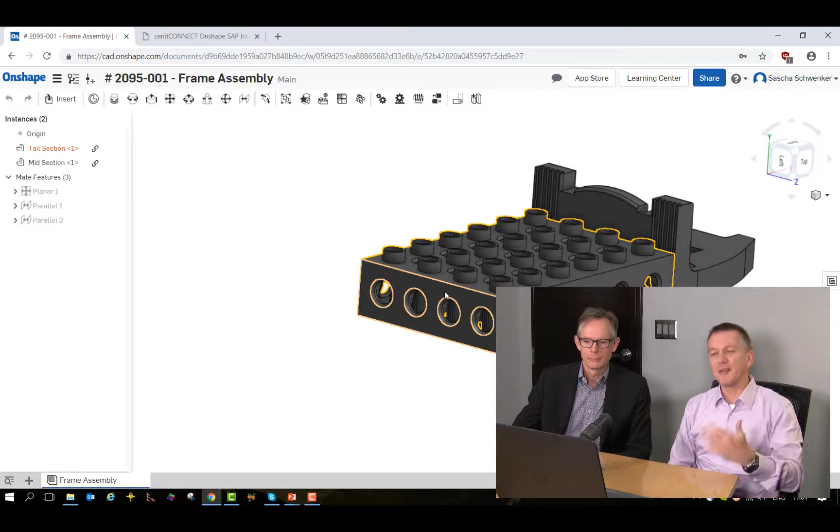Onshape. We did a single release to this, so a kind of a quick introduction to this in the last video. And we basically start over here where the quick introduction stopped. So what you see here is our integration into Onshape. I will emphasize Onshape a little bit more later on, but just note that we have version 4 actually inside SAP with all documents. It's all checked in, all buttoned up, all inside SAP.

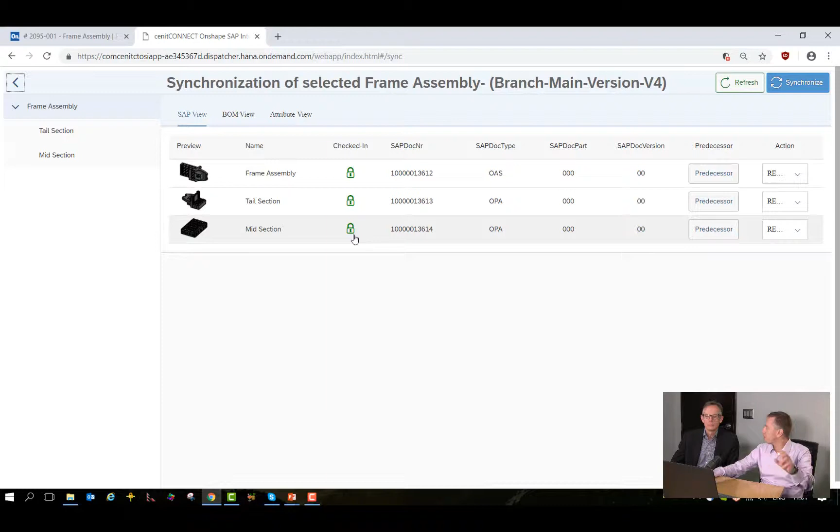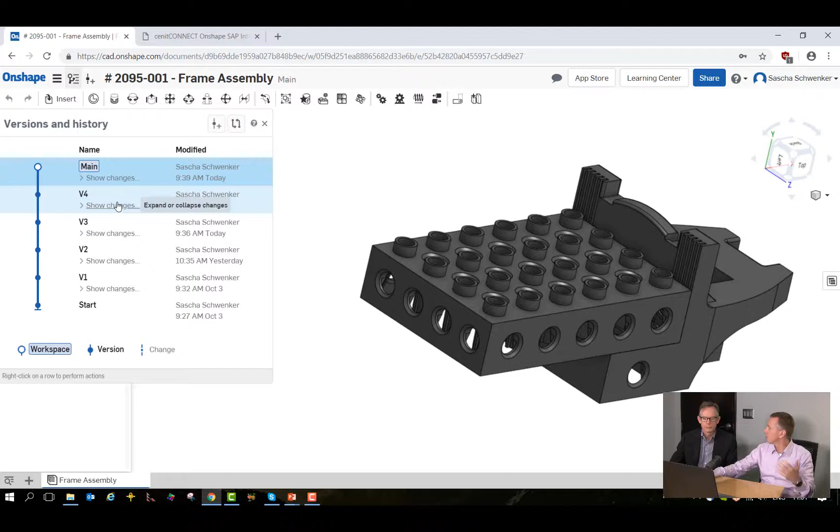So if I go back to Onshape right now, this is my Onshape assembly here right now. It has 2 items. If you know or don't know about Onshape, it is very heavy on versions - you basically create always a new version with every single design change. So I'm on the 4th version, and this is the version I synchronized over to SAP. What I will do here right now is a small modification. I will introduce a brand new part never seen inside SAP, and then we see how the integration picks it up. We create a new version and basically show the integration functionality.

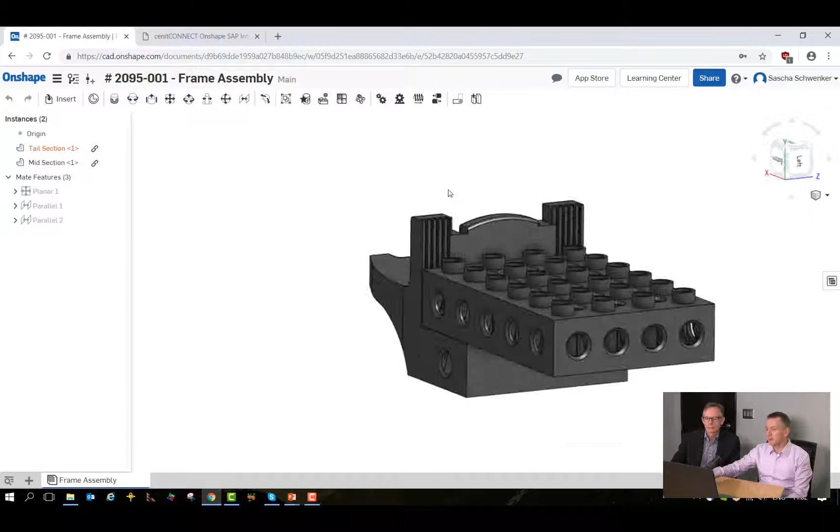So maybe some introduction to Onshape - like Paul said, it's a cloud-based CAD system. This lives in, in this case, Chrome or any kind of Internet Explorer, or any kind of web browser. You see I can spin this around, so it works pretty well - performance is pretty good actually. And I have here all the functionalities to mate these 2 items together. So I'm in what we would call the assembly workbench.

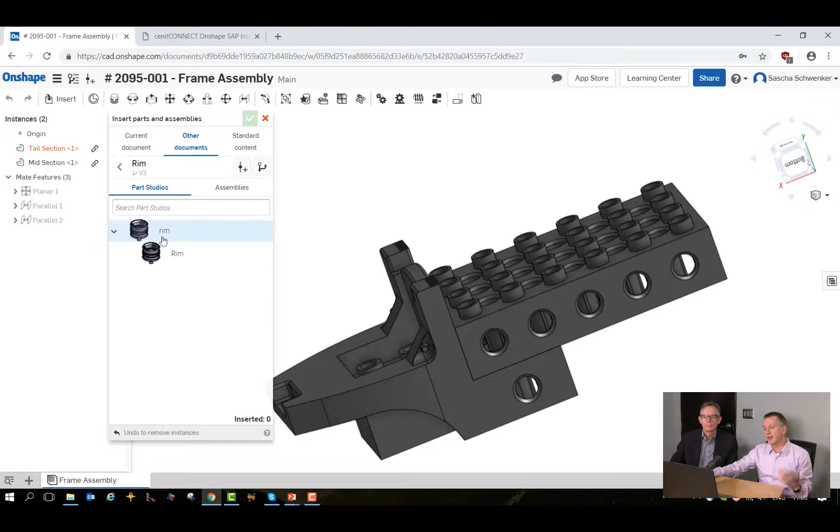So what I do here is I will insert a new part. I can get this from my other documents in Onshape, and I have my so beloved Lego digger. So I imported this into Onshape, and there's a new item - this is the rim. You see the rim has the newest version, version 3, here. And these versions don't really have a lot to do with the SAP version - this is really to be seen how they match up to versions later on inside SAP. So now, where's my rim?

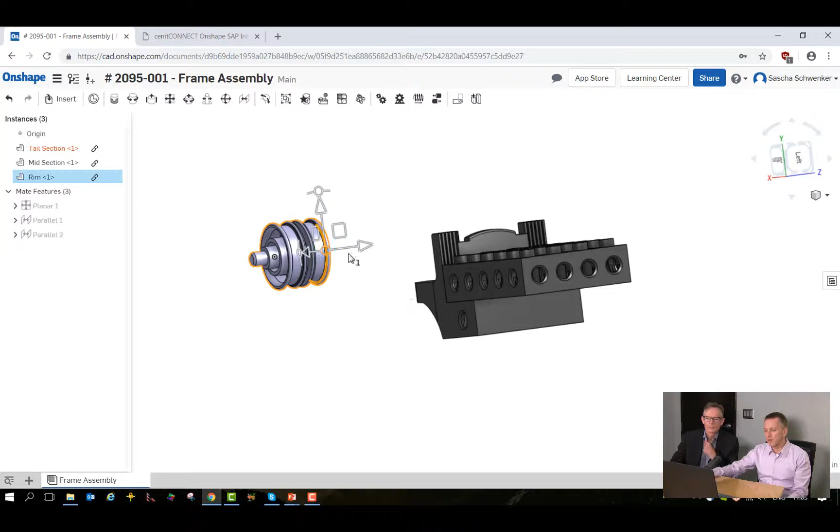This gives me some more freedom on the version and revision management here. But now I can basically place it, move this around, and position it into the right place inside my assembly. So I'm stopping here, not showing that I'm the best...

Onshape designer here. So what we take out of this is the rim is now inside the assembly.

Actually, I'm waiting for you to start singing here, somehow. I hadn't really prepared anything. Okay, all right, so it just somehow occurred to me.

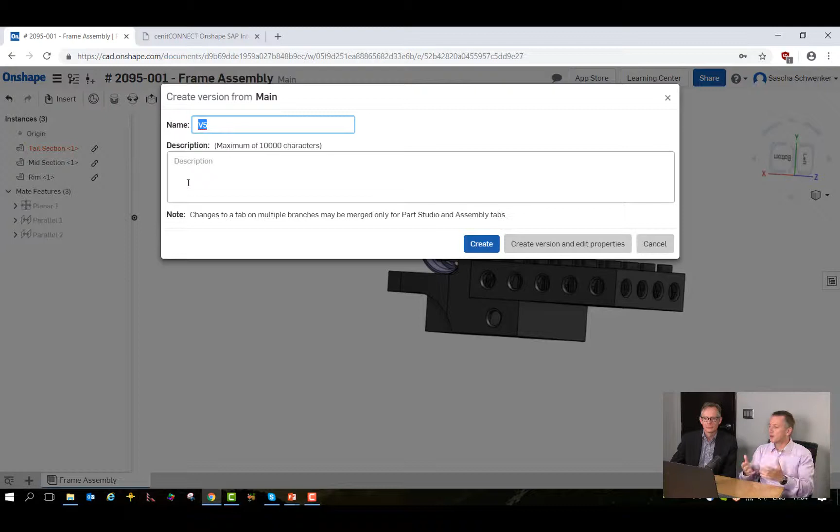Good. So with this change, with the import of the new rim—and normally I would import all 4 rims, etc.—what I would do in Onshape is create a new version. This version is basically a design milestone in my assembly.

So I say this is my version 5, added new component, this is correct, and I create this version inside Onshape. And that's it—you see there's no save, because we are right away in the cloud. I don't need to save any files, nothing. This is saved the second I perform this action.

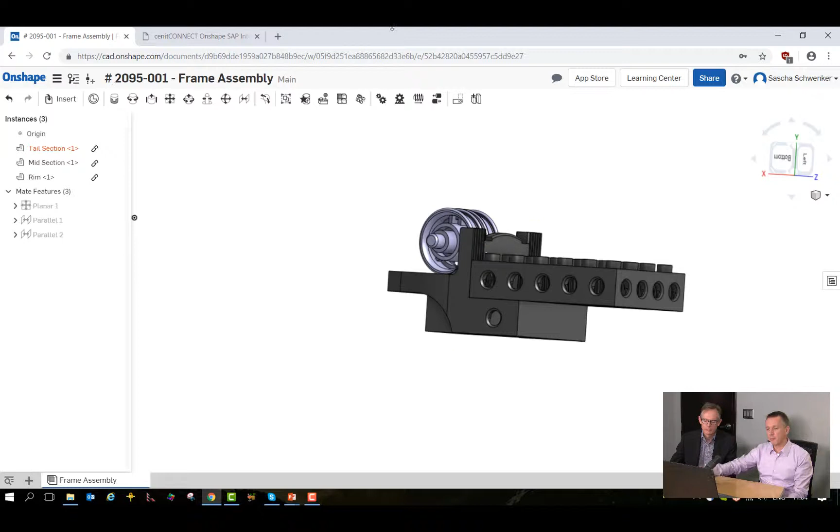So now let's come back to the integration aspect. What we are doing here is scanning the Onshape database, and the system sees right away there's something new, and I can now pick my version 5 of this rim. You see I have all the other versions as well to my disposal, but in this case I say I would like version 5, and I say let's load this version.

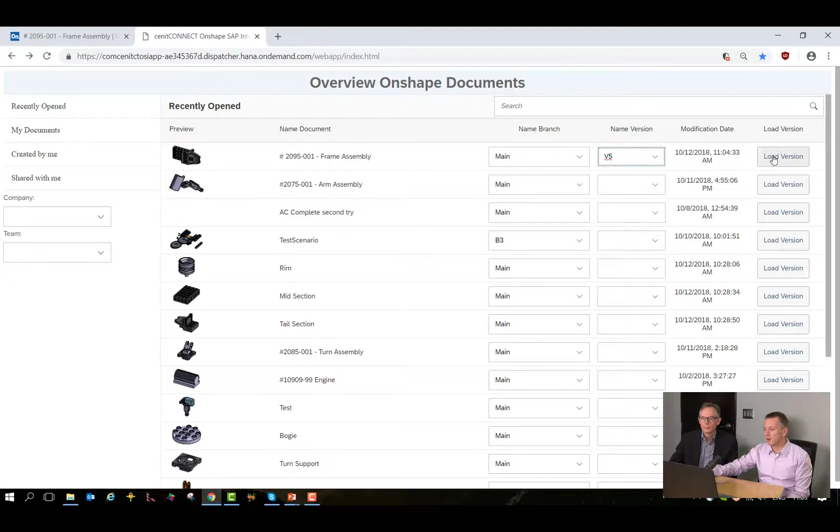With this load version, what we are doing now is scanning the information—basically we dig into the Onshape database, scan all the items, scan all the new parts, and reconcile what is in SAP with what we have in Onshape. This is exactly what we see here: we have something already in Onshape, and we have something which is brand new, and the system is already giving us suggestions what we should do.

So it tells us here, create a new version. It recognized that we didn't do any changes to the tail section and the mid section. It also recognized that the rim is not checked in, and it tells us right away we probably should create this. So what I do here is I now synchronize the information.

Synchronize here means that we create new objects, create new versions—you see slightly in the background here, we already created a new version for the assembly. We will now create a new document info record for the rim, and then check everything back into SAP.

What also happens in the background is we create the document structure, the document BOM. We create neutral formats for these items, so we are creating parasolids. And inside SAP, with the status change, we could now generate from the parasolids right hemisphere or visual enterprise models so that we visualize this inside SAP.

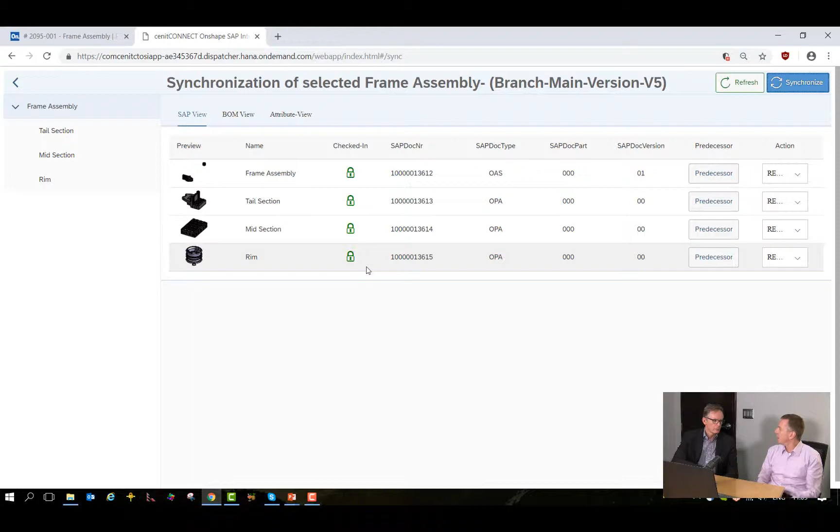Very good. Good? Excellent. And you keep on pushing my love over the borderline. I know that this will come, I was waiting for it the whole time. You pushed me to it.

My tenuous introduction to that is this is really about removing borders, extending the capability, cloud-based, extremely powerful. The great thing about this is we always discuss with every customer how they do collaboration with outside suppliers, for example.

So we will do it also for Onshape, how this makes life very easy for outside supplier integration with inside design departments, because there's no server anymore to be placed. This will definitely change how engineering departments think about collaborating with internal or external people, maybe far in other countries, other parts of the world, because they're all sitting in the same cloud now.

Yeah, see, it was relevant. Yep. It's going to be very interesting to see how this develops over the next few years.

And we will stay on the pulse here, so we will issue a couple of editions on this one. This was really after the very, very single release—this is the album, the album release, but there will be more albums too.